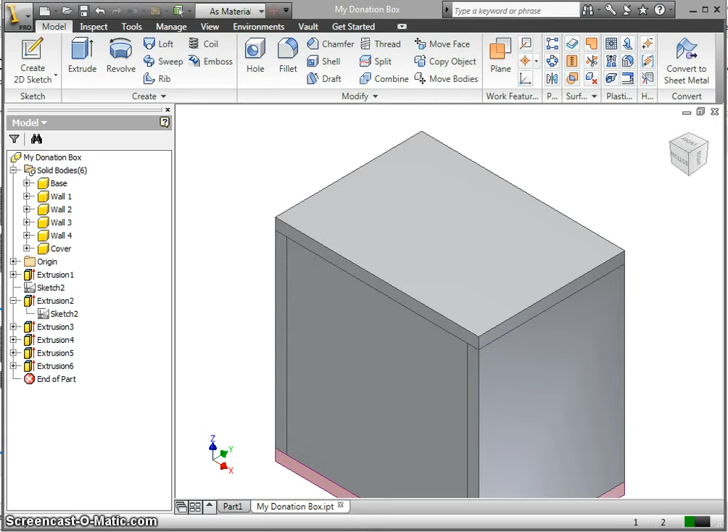Okay, in this video I'm going to do a slot on the top of this donation box. Same thing like what I've done just now: create a 2D sketch, click on the surface, just create any rectangle, something simple. Finish sketch, we do extrude, click on this area.

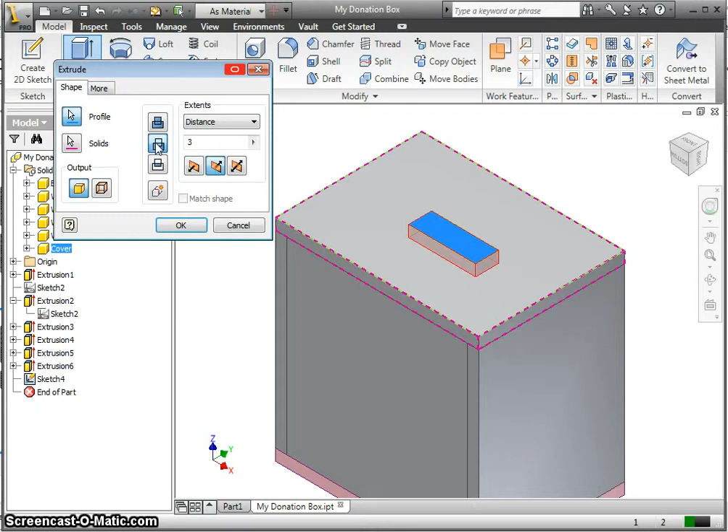Instead of building a new solid, because we don't want any more new solid, we want to cut this hole. So I click on the center button, call it cut. Once you click cut, you click OK. You see the hole is being created.

If I look from the top, I can click this to see from the top view. I can click on these arrows to rotate it. You can see it's pink color below, because my base is pink color. Okay, so I have the slot here already. The slot is created. So I've done this.

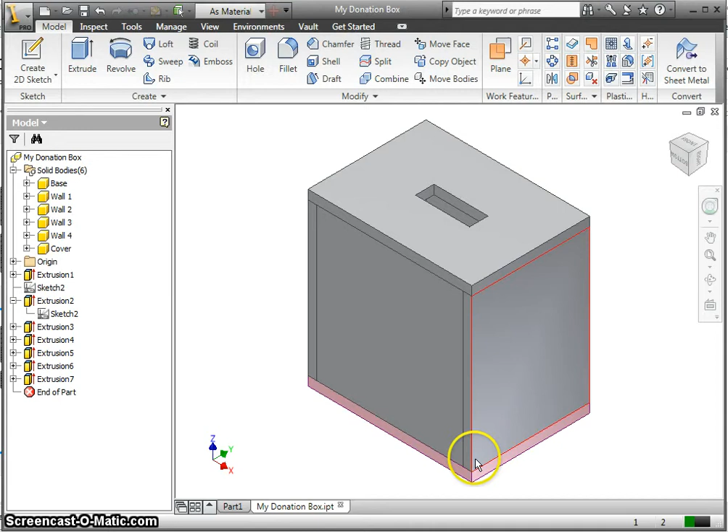Next, what I'm going to do is I'm going to see whether my size is correct. Let's say if I drew the size wrongly, actually the donation box should be much bigger. What do I do? I have to start from my base. So my base size is actually wrong. So I click my base and I realize that my extrusion one should be much wider.

My extrusion one, if you look at the browser, is based on my sketch one. So I'm going to double click sketch one and change the size of my donation box. I can click on dimension, touch the line and drag it out. You see it's 54.8 mm, something like 5.4 centimeters, relatively small.

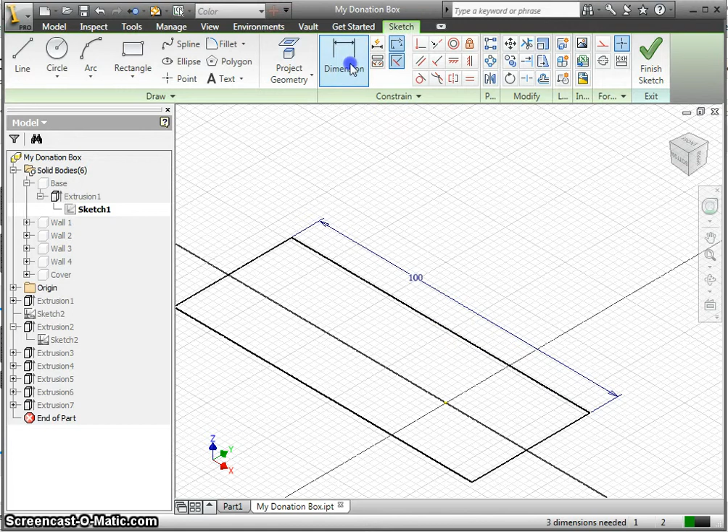Let's try to change this to 100. And the dimension of the other, the width 39, change to 100. Okay, now it's become much bigger. What I'm going to expect is when I click finished, my box has become much bigger. If you realize, relative to the size of the coin slot, this box has become much bigger.

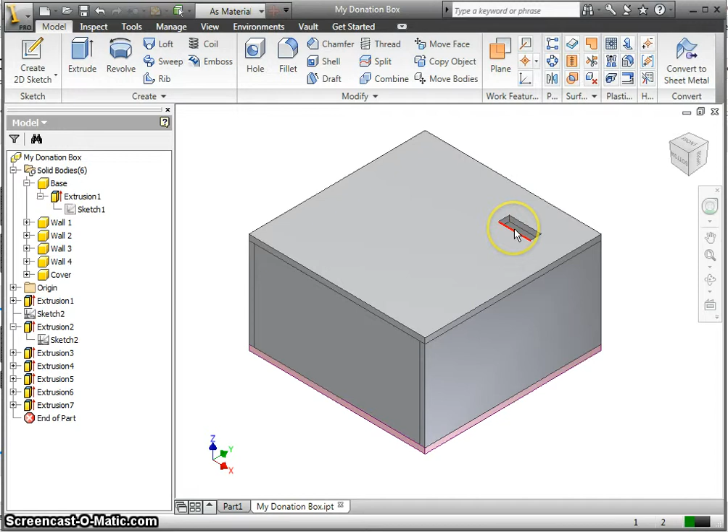The other thing is, if I want to reposition this coin slot to the center of the box, what do I do? I have to simply look at the last extrusion which I did. I go and click on my browser. The last extrusion is extrusion 7. Extrusion 7 is based on sketch 4. So I'm going to double click sketch 4 and do the same thing.

Let's go in and see what's the size of a normal coin. Maybe the thickness should be 5 mm and the width of the coin, let's say maybe it's 2.5 centimeters, so I'll make it 25. Finish sketch, and I have the proper size coin slot.

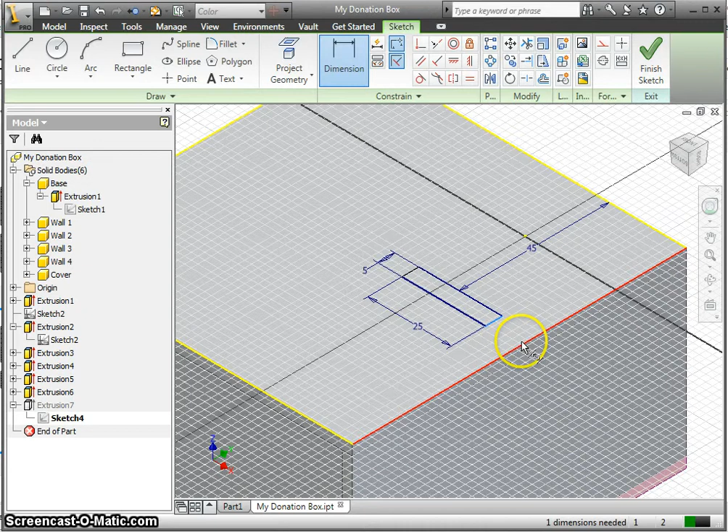Let's go and double click sketch 4 again. Dimension it, how far away from the edge it should be. Let's put maybe 45, a rough gauge. Okay, from the edge to the end of the coin box, the donation box, let's put another 45, something like this. If it's too much, then maybe 40.

Okay, something like that. So for your donation box, you have to make sure that you know exactly where it is. So roughly in this case, I've repositioned it. If I finish the sketch, you see I managed to shift the coin slot. Okay, so with this, you managed to complete the whole donation box with a standard cuboid and 6 pieces of acrylic, 3 mm thick. The dimension is 100 by 100 by 50.

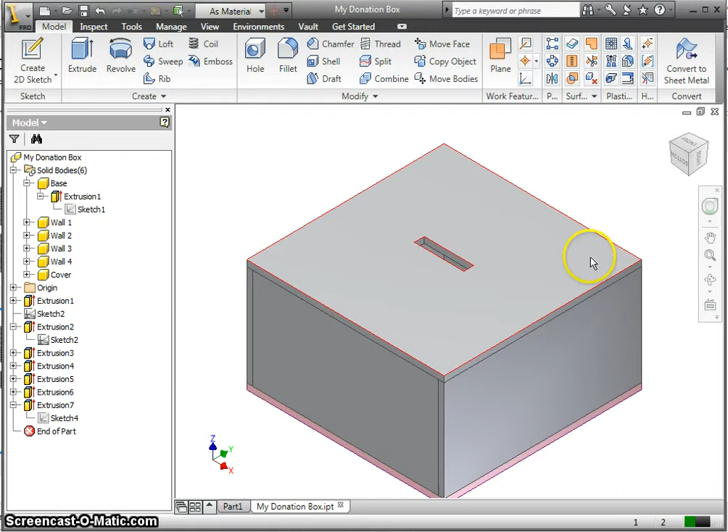Yep, so this should get you started with your projects in the future.